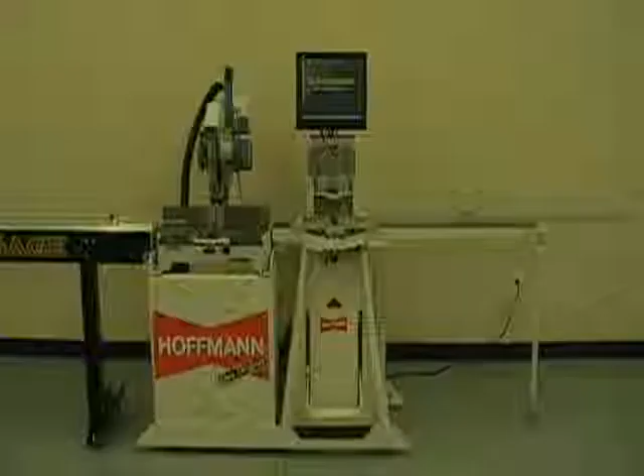The automatic stop system is made by Technical Services Inc., the designers of RazorGage. We offer machine packages with 8-foot or 10-foot stops, and we can also supply longer or shorter lengths if needed.

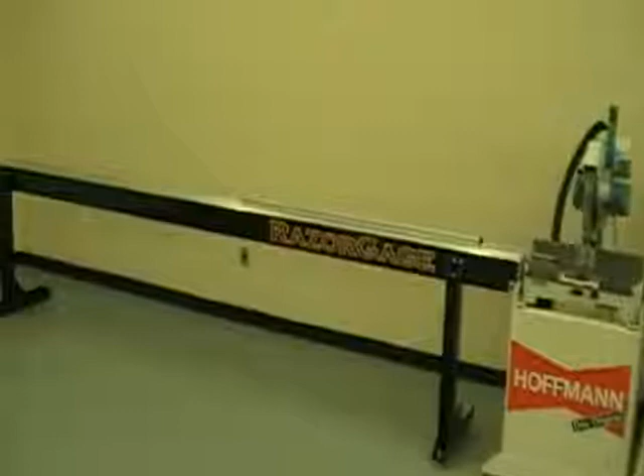The RazorGage systems distinguish themselves from the other stop systems on the market by paying close attention to the critical details. Instead of relying on plastic or steel wear strips, they utilize THK linear bearings and steel rails for the carriage travel. Also, they use larger zero clearance pulleys with planetary gears, and each RazorGage is laser inspected for accuracy prior to leaving the factory.

Precise and accurate cuts are critical for tight-fitting joints and perfectly square face frames. The cutoff saw is a production model made by OMGA Woodworking Machinery, and it has proven itself in thousands of woodworking shops around the world. The machine has a heavy cast iron base and is a belt drive design, 2 features that reduce vibration and improve the quality of cuts.

The 14-inch blade gives us a maximum cutting width of 6 3/4 inches at a 90-degree angle. This covers the vast majority of face frame stiles and rails.

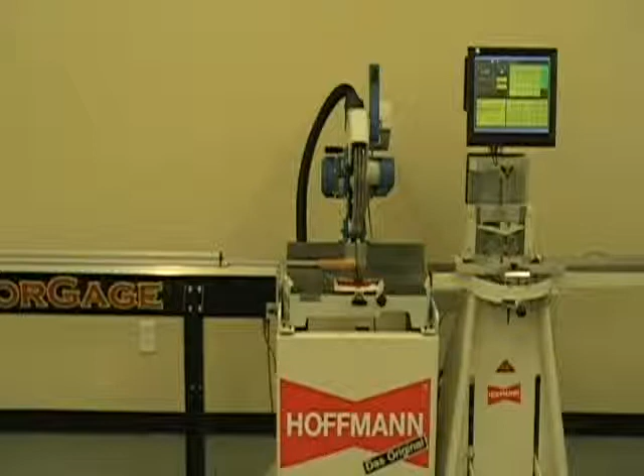MORSO notching machines have been used around the country and around the world since 1911. We've been the U.S. importer for over 10 years. The company makes both manual and automatic models and are all available from stock. For this video, we've installed the foot-operated NFXL model.

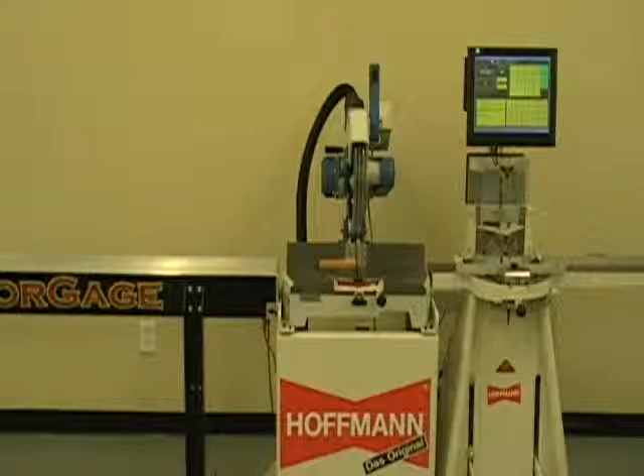This machine accepts molding up to 6 inches thick and 8 inches wide. All hard and softwoods can be processed with ease. In fact, we have customers building the face frames with soft pine and cypress, and on the other end of the spectrum with rock maple, teak, and even ipe.

To design a face frame right on the screen, open the face frame builder, then click on New Frame. And for our example of a vanity base, enter the overall height of 36 inches and the width of 30 inches. Depending on the cabinet, a top rail might be wider to allow for crown molding, or a stile may be extra wide for scribing. The software is designed to accommodate varying widths of stile and rail.

In our example, we're using a 2-inch top rail, a 4-inch bottom rail, and 2-inch wide left and right stiles. With the perimeter parts selected, press OK, and the basic frame is now displayed on the screen. To add a cross rail between a drawer and a door opening, select Rail, enter the clear dimension between the upper rail and the new cross rail. In our example, we are using 6 inches.

To add a vertical divider, click on Stile. If you want it centered, click on this box. The program will do the rest. When all the parts are added, click on Save Frame, give the frame a name, and save it on the PC. Now click on Make List. This will format the entered data into a cut list, which is also displayed on the screen. The designing portion is now complete. The next step is the machining process.

Open the RazorGage software, select Auto List, and click on a file name. A detailed list of all parts needed for the selected frame is now displayed. Select the first piece and the RazorGage will automatically move into position. After cutting the part to length, click Part Cut. If there are multiple parts to be cut, the program counts down the total and draws a line through the description after the last piece is cut.

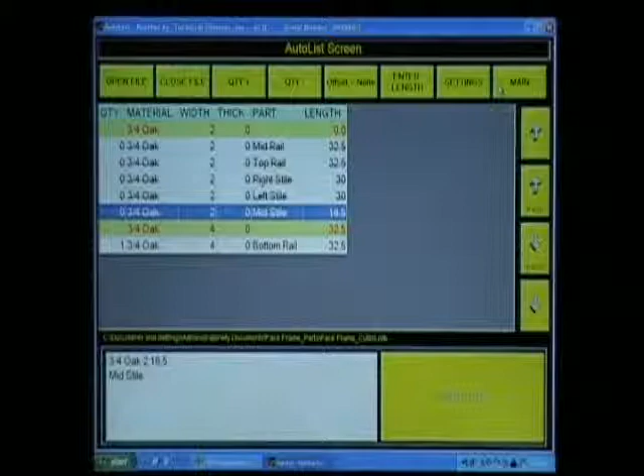When all the pieces are cut to length, the stiles and rails are now processed on the MORSO notching machine. On the main screen, select Notching. Highlight the file name to see a list of all parts needed for that particular frame. Select the part displayed on the screen, with all required notch cuts highlighted. Place the molding on the machine table and click on the screen to advance the stop system to the first notching location.

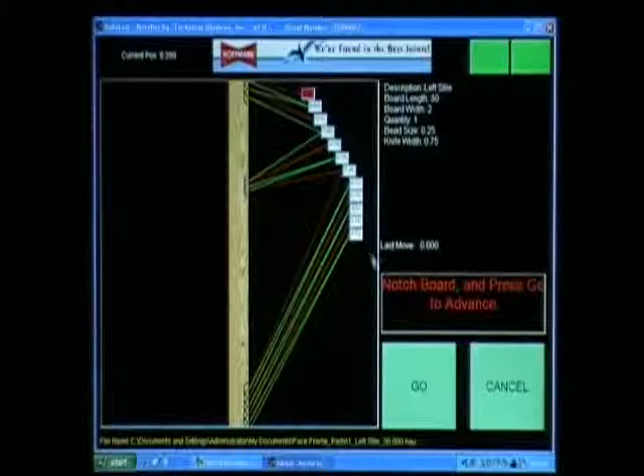Holding the molding with the left hand, the cutting head is moved toward the beaded edge with a hand lever, and stepping on the foot pedal brings the head down. Multiple passes are needed for clean and tear-free cuts. Depending on the wood species, it usually takes from 2 to 4 cuts to notch a bead. When the rail is finished, it is set aside and the next piece is processed.

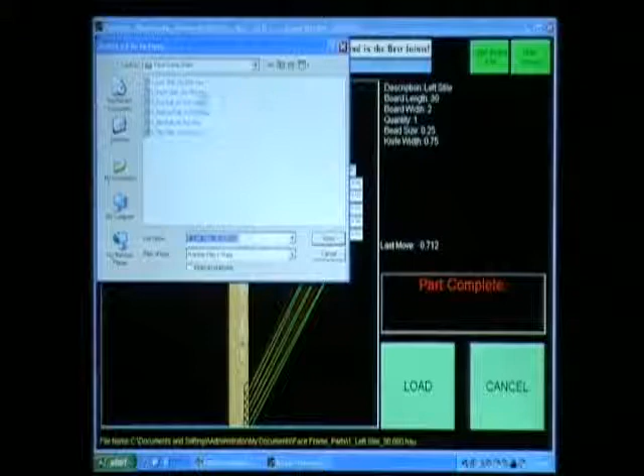The knives are designed to stay sharp for a long time. In custom woodworking shops, we frequently see them used for over a year before they are sent back to us for resharpening. We have the equipment necessary to regrind and hone the knives to factory specs, and we generally return them to the customer in just a few days.

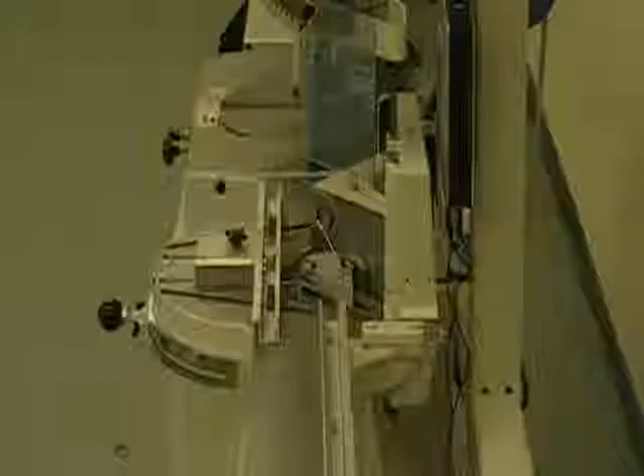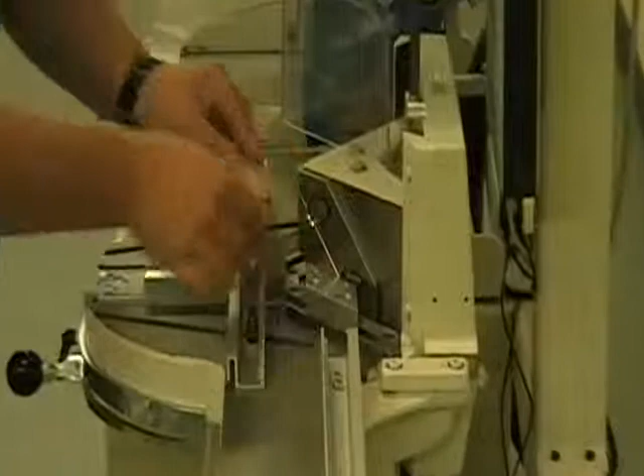Here we are doing a quick demo on the MORSO NFXL. The stile is placed face up on the table, and multiple steps will assure a clean notch. The adjustable stops next to the head are set to limit the travel of the cutting head. These are adjusted to match your bead. You can easily cope the end of the rails in one single pass.

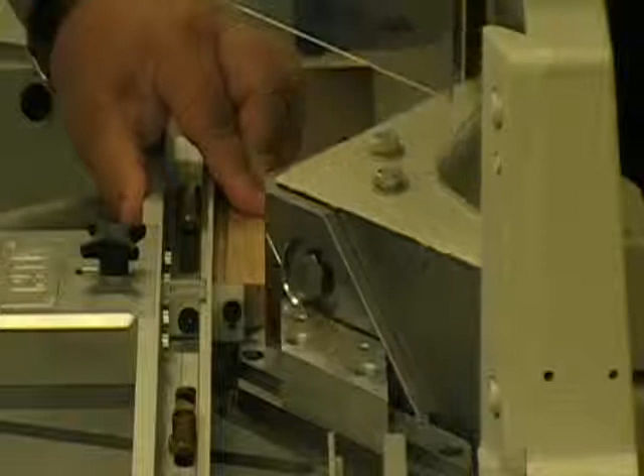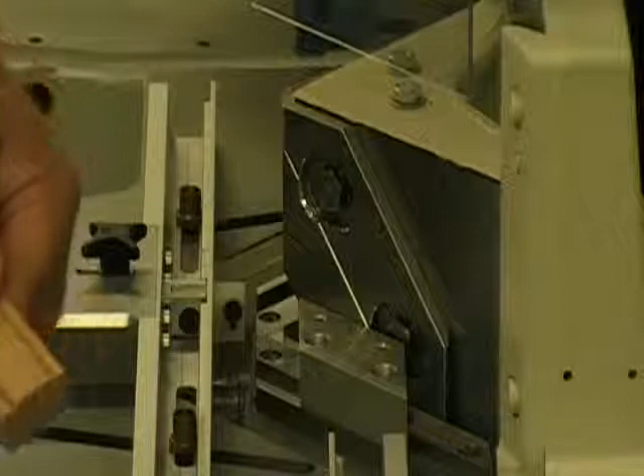After the stile is notched and the rail is coped, you'll have a tight, perfectly aligned joint and are now ready to go to the next step. Notching machines are available in the manual version as you have just seen, or electro-hydraulic for higher productions.

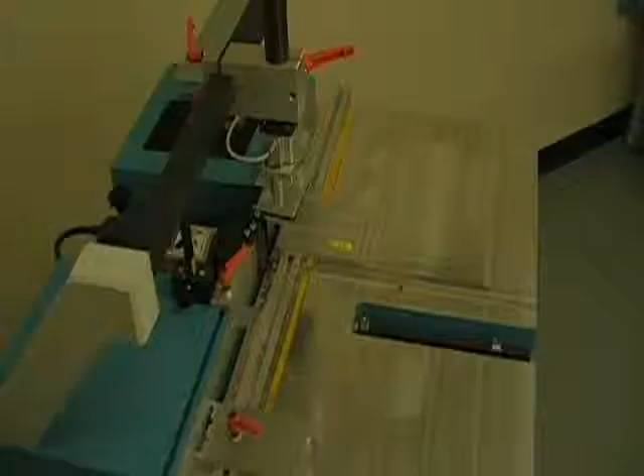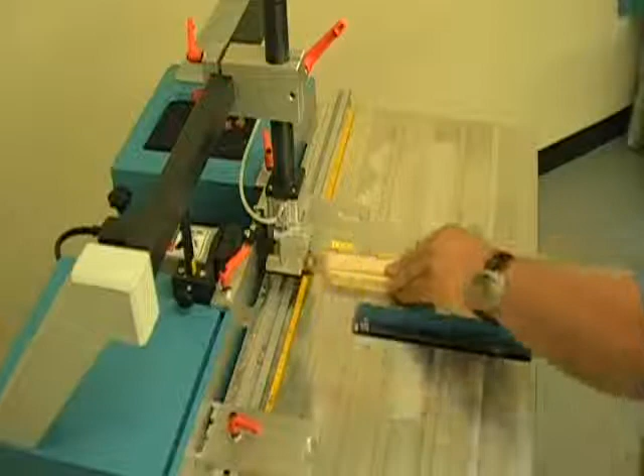Once all of the components of a face frame are finished, the frame is assembled using the Hoffmann dovetail joining system. We have set up our PU2 floor model routing machine for this operation. The fixtures on the machine locate the notched molding precisely above the router bit, and the square stop is used to reference the location of the coped rail.

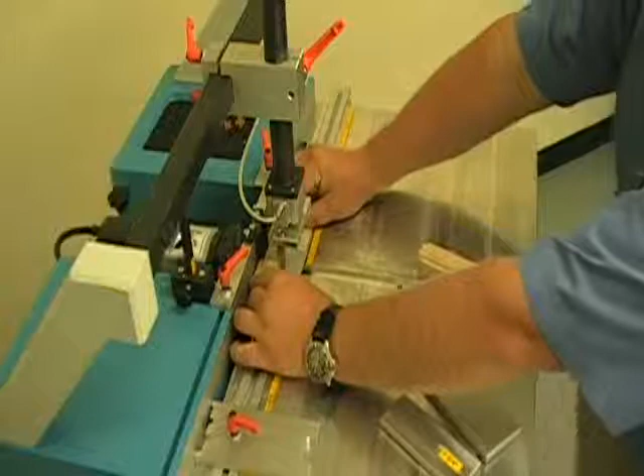Once the keyways are routed, some glue, the dovetail keys, and a hammer is all that's needed to assemble the frame. No assembly tables, presses, or clamps are needed to complete the frames. This completes this portion of the video on our face frame combination system.

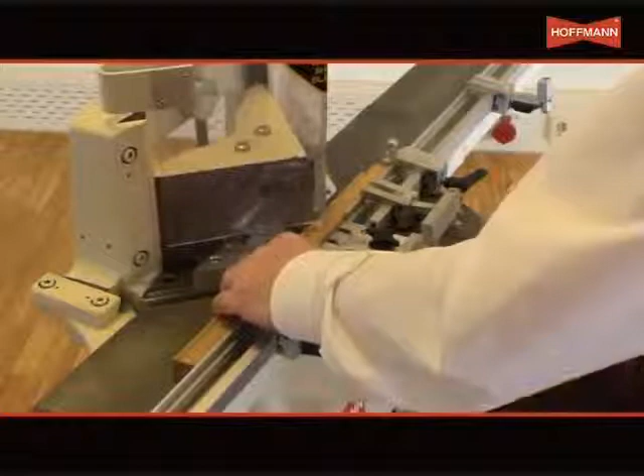Cutting the notch positions in stiles using the MORSO NFL. Place the workpiece on the table and start by cutting the corner first. By moving the profile, nibble in stages until it reaches the stop. Flip the stop back, move the workpiece to the second stop by using the hand lever. Make 2 or more stage cuts as required to make the second notch.

Move the workpiece beyond its final position and trim the corner. To start the final notch cut, set the flip stop in its final position and finish the final notch. The first stile is now complete. The second stile, opposite hand, is processed in exactly the same way.

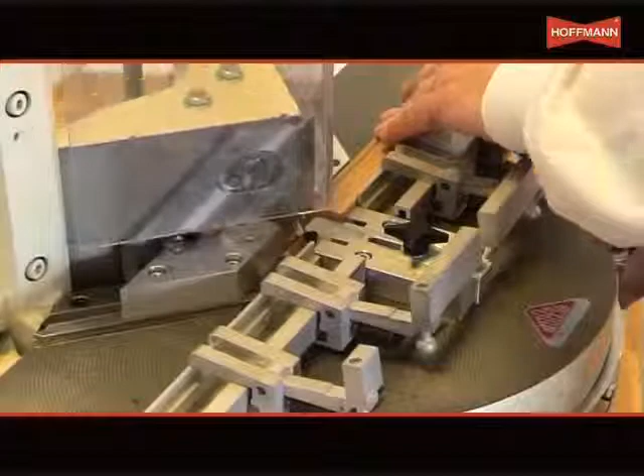To cope all the corners, release the center stop, move it forward and then retighten. Position the ends of the top rail against the stop and cope the corners of the beaded edge left and right. Position the center rail against the stop and cope all the corners. Position the bottom rail against the stop and cope the corners. The frame is now fully notched.

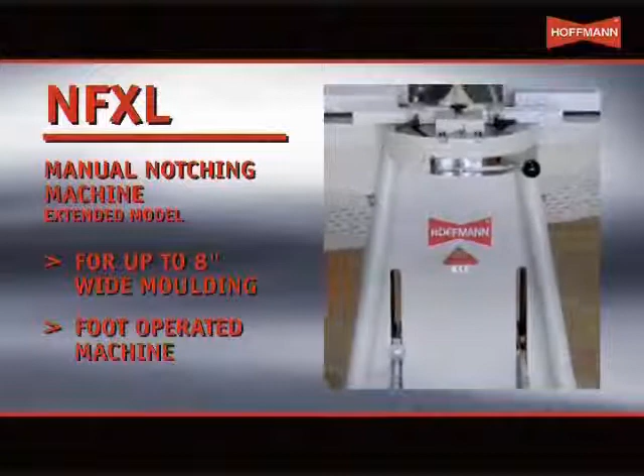Cutting the notch positions in stiles using the MORSO NLEH. Place the workpiece on the table and start by cutting the corner first. By moving the profile, nibble in stages until it reaches the stop. Flip the stop back, move the workpiece to the second stop and using the 2 hand buttons actuate the machine to make 2 stage cuts to make the second notch.

Move the workpiece beyond its final position and trim the corner. To start the final cut, set the flip stop in its final position and finish the final notch. The first stile is now complete. The second stile, opposite hand, is processed in exactly the same way.

To cope all the corners, release the center stop, move it forward and then retighten. Position the ends of the top rail against the stop and cope the corners of the beaded edge left and right. Position the center rail against the stop and cope all the corners. Position the bottom rail against the stop and cope the corners. The frame is now fully notched.

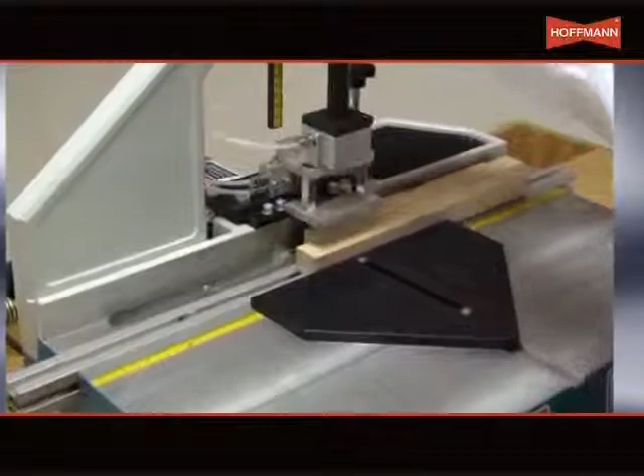The notches have already been processed on the MORSO guillotine. We must now router the dovetail slots in the profiles using the Hoffmann dovetail routing machine. Using the center fence and packing piece, lay the first stile in position and lower the clamping unit to the workpiece. Start the routing process using the foot pedal and router the first dovetail slot.

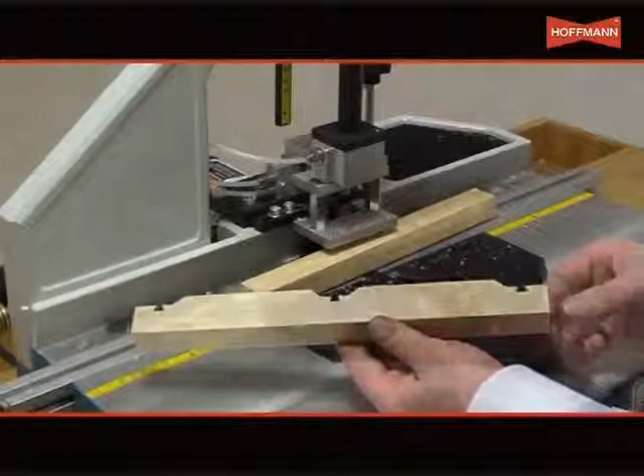Move the workpiece to the next notch position and repeat the process for all notch positions. The second stile, opposite hand, is processed in exactly the same way with Hoffmann dovetail routed slots. We then change over the fence system to accept the cross rails. Remove the centre fence and replace with the sliding stops against the set screws.

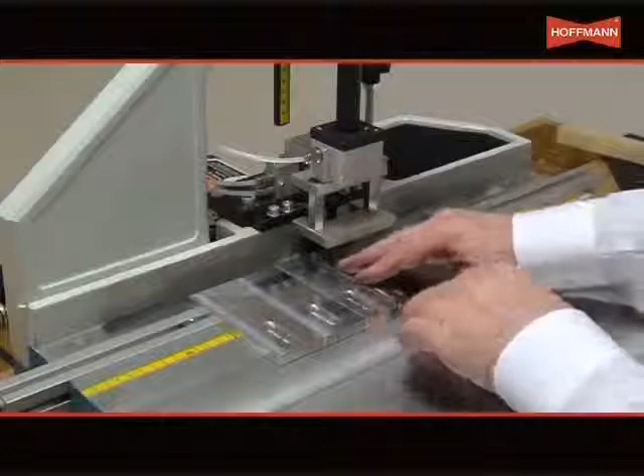We can now process the cross rails. The simple rule to follow is that a beaded edge is always laid against the sliding stop. The foot pedal is pressed to actuate the routing process.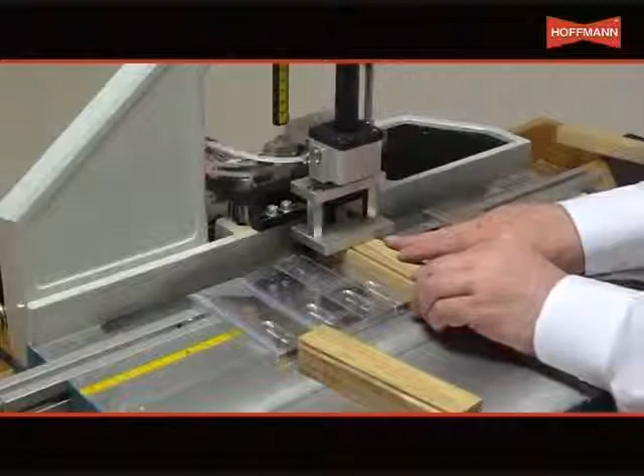Slide the stops to the right hand side of the machine and process the other end of the rails. Centre rails, which are double beaded, can be processed without sliding the stops to the other side. The complete frame is now processed, ready for assembly.

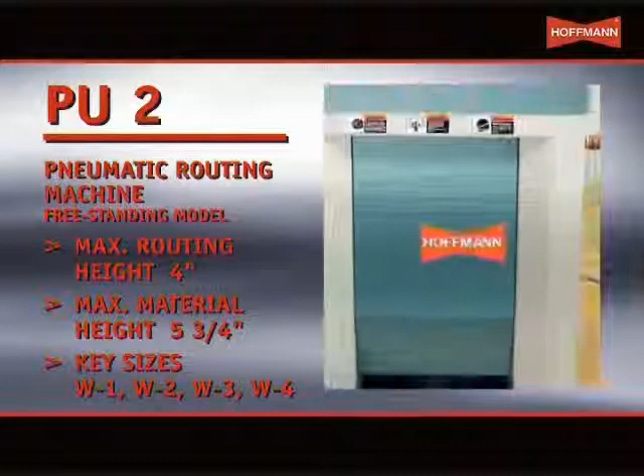To complete the assembly, glue is applied to the mating surfaces, and Hoffmann dovetail keys are inserted to draw the joints together. In production, a complete frame can be notched, routed and assembled in approximately 4 minutes per frame.

Hi, I'm Steve Hosher with Technical Services Incorporated, and I help create the RazorGage line of saw stops and measuring tables. We at Technical Services RazorGage developed this video to provide you with a better understanding of precision linear positioning and to demonstrate the benefits RazorGage has to offer.

Our RazorGage products are designed around the following design criteria: reliable long-term accuracy, ease of installation, maintenance, and repair, open control architecture, and choice. Reliable long-term accuracy to us means to minimize the likelihood of your producing a bad part ever. Not just for the first 3 months or the first 3 years. Our goal is to provide a positioning system that goes to the right place all the time, period.

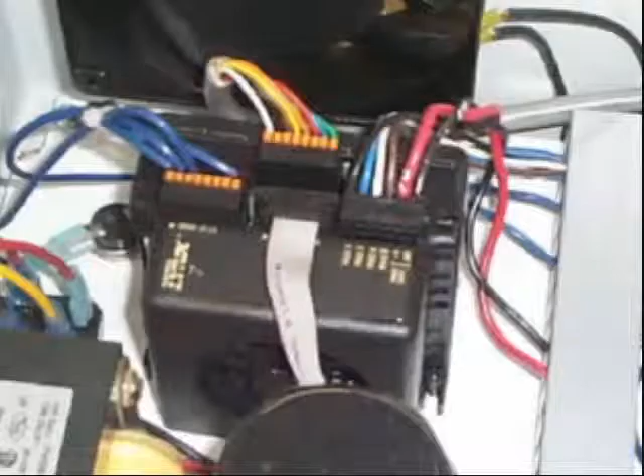In order to explain the steps we take to attain reliable long-term accuracy, let's take a look at how motion control technology works. A typical linear actuator includes a controller and drive, motor, mechanical drive system, support bearing, and an encoder mounted to the rear of the motor. The controller and drive make the drive shaft rotate. The drive mechanism converts the shaft rotation into linear motion. The support bearings maintain the orientation of the carriage as it moves.

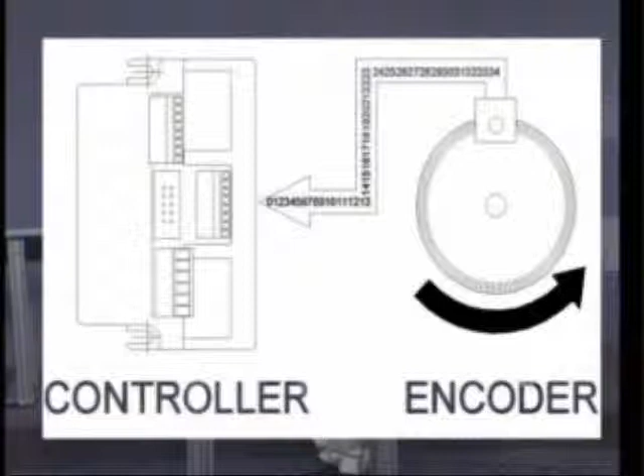The controller verifies the commanded motor position by keeping a running count of the pulses returned by the encoder. Equations in the controller convert these pulses into theoretical linear position. Since the controller only knows the position of the encoder, the challenge on this type of system is to try to make sure that if the stop moves, the encoder moves.

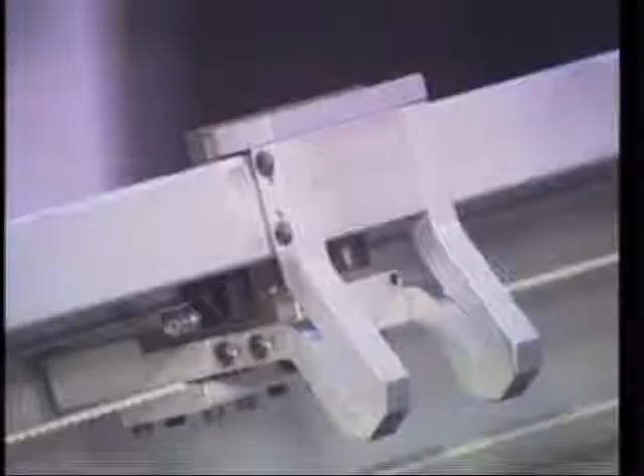Controlling play in the carriage support bearing is the first step in keeping stop position in sync with the encoder. It's the job of the carriage support bearing to maintain the orientation of the carriage as it slides down the rail. If the carriage support is sloppy, then the stop position can change. For the RazorGage carriage support bearing, we've chosen a machine tool grade recirculating ball bearing block riding on a hardened and ground steel rail. The balls in the bearing block are selected to provide a negative clearance condition or preload to eliminate slop. A tight-fitting seal keeps sawdust out and lubrication in.

This style of bearing assembly is rated for over 3,000 pounds radial static load and has a long history of successful application in high-end machine tools and woodworking equipment. There are no gibs or pads to adjust. Just grease the block a few times a year and this bearing will be rigid for years. Eliminating slop in the carriage support is easy. You just find the best bearing on the market and buy it. But there are a number of components between the carriage and encoder that can introduce lash into the system.

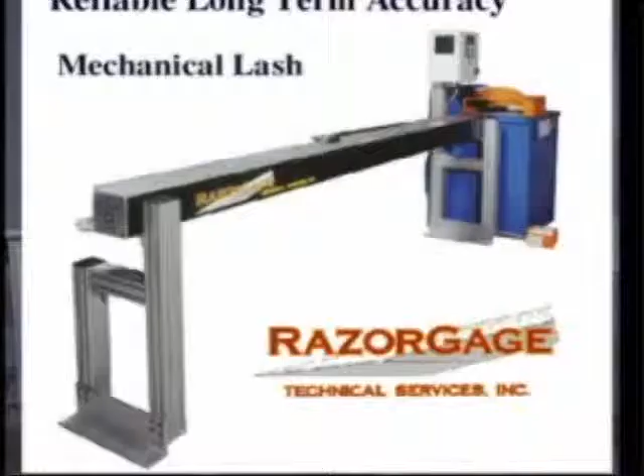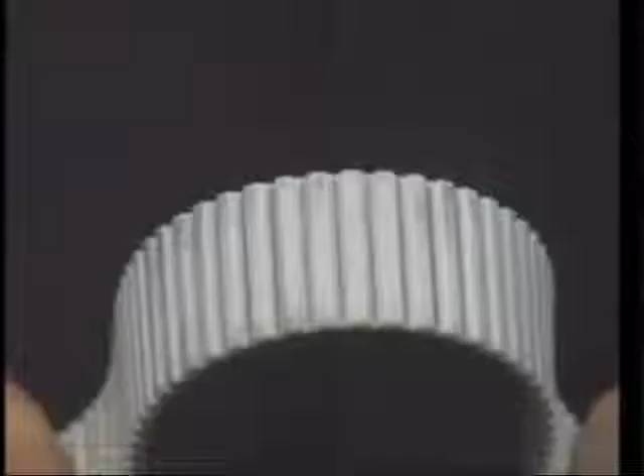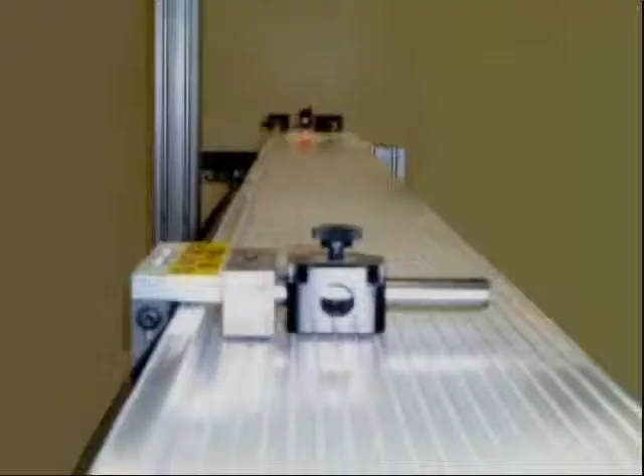We approach mechanical lash in the drive system differently on the different RazorGage models. On any rotary encoder system, long-term accuracy depends on the integrity of the drive components. For RazorGages using a belt drive, we use a high-test polyurethane belt reinforced with steel cables to resist stretching. We use a zero-clearance drive pulley to eliminate the play inherent to standard belt and pulley combinations, and we drive that with a precision planetary gearhead with near-zero backlash. To top it off, we calibrate each unit with a laser displacement meter before shipping so we know it's accurate before it leaves our plant.

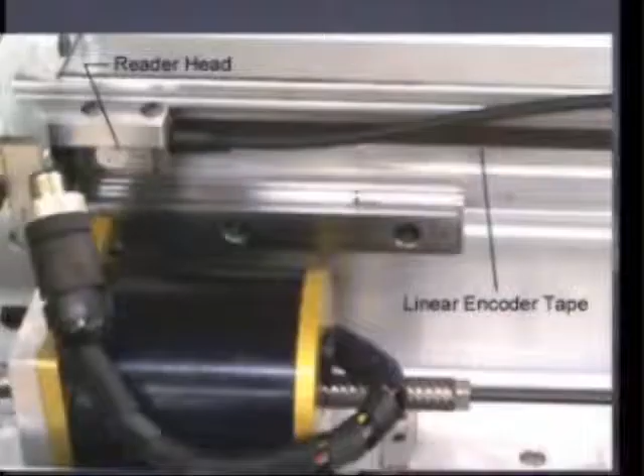While we offer the RazorGage with rotary encoder feedback, we do so knowing that one day something as insignificant as a loose set screw, a washed out keyway, or imperfect belt tension can completely undermine our desire to provide reliable accuracy. That's why we pride ourselves on manufacturing the ultimate programmable saw stop, our top-of-the-line linear encoder models. By eliminating the rotary encoder from the back of the motor and instead using a linear tape encoder that runs the length of the table, we completely eliminate all problems associated with mechanical lash. The linear encoder ensures that no matter what condition our drive system is in, the controller still gets accurate positional feedback.

The non-contact operation and solid-state design of the linear encoder makes it a long-life device, and since it's magnetic and not optical, a dusty environment doesn't affect the operation. As we all know, any device can fail, so as further assurance that you make only good parts, we provide an on-target lamp on all motor-driven RazorGages.

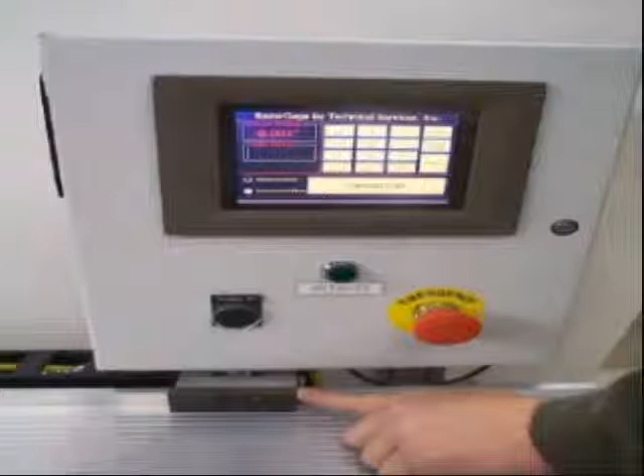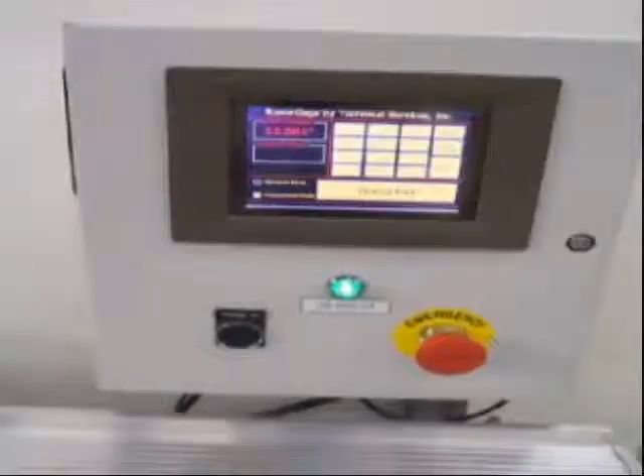If some problem develops with the linear encoder, such as a crushed cable or a loose connector, the erroneous signal will cause the lamp to flicker or not come on at all. But when the lamp is on steady, the chances are very slight that you can make a bad part. This light is wired in series with a relay so you can lock out the saw when the stop is not in position. These and other measures enable the screw-driven RazorGage to achieve plus or minus 0.03 of an inch accuracy over 10 feet.

To back up our claims, we laser check every linear encoder RazorGage before we ship it, and we put the charted results in the manual so you can be sure your product meets RazorGage standards. We believe we make the most accurate and reliable stop on the market, but when components fail, we make them easy to service by incorporating this removable guard.

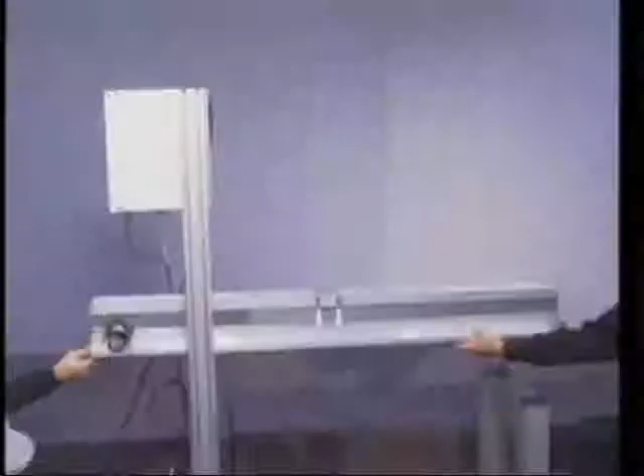4 screws secure the removable back guard panel that, when removed, allows access to the entire inside of the RazorGage. Electrical components are easily accessed in the eye-height mounted electrical enclosure. All our parts are standard catalog items that can be bought from local distributors.

We make the RazorGage more flexible by using an open control architecture. That just means we use products that can be customized and serviced by your own people or by someone in your local area. Our controller is programmable and expandable with software, manuals, and programming examples that can be downloaded from the manufacturer's website. You don't need to come to us if you want to change.

We provide you with a truly easy way to download cut lists over your PC network, our CE option. A color touchscreen PC running Microsoft Windows CE replaces the standard keypad. It supports Ethernet communications, barcode readers, and an optional printer port, and enables the RazorGage operator to download cut lists from a PC on your existing Ethernet network.

You just paste your data into an Excel spreadsheet, save it, and it's available to the RazorGage operator on the manufacturing floor. For applications requiring a full-blown PC, we offer the PC option. It includes a color touchscreen panel PC running a Microsoft Windows operating system.

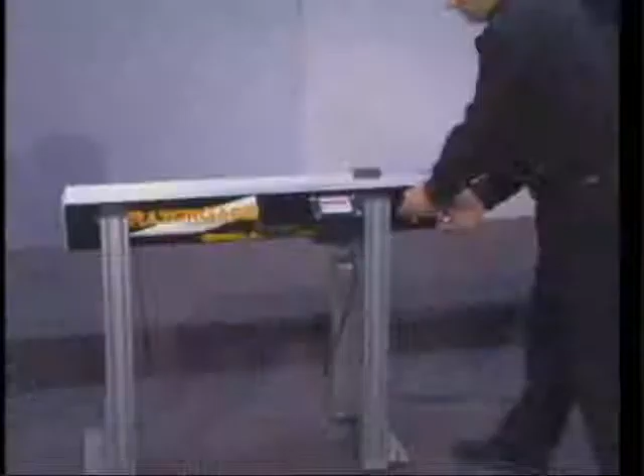It is accurate to plus or minus 0.05 of an inch over 10 feet, is available in strokes from 24 inches up to 22 feet, and can be motor-driven or hand-wheel driven. The hand-wheel drive unit is great if you want the RazorGage performance at an unbeatable price. We also offer all the belt-driven RazorGages with rotary encoders if you can live with tolerances in the plus or minus 0.15 of an inch range.

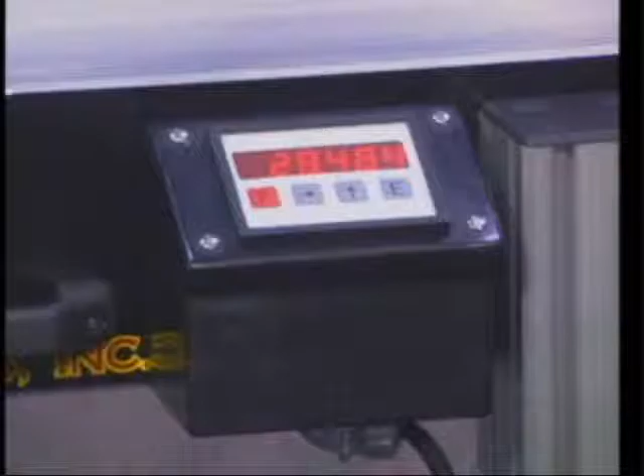If you just want to measure parts, we offer the RazorGage caliper measuring table. You just put the part on the table, push it against the hard stop, and measure it. Well, we've talked about the 4 major benefits we strive to provide as we design the RazorGage and the means by which the RazorGage achieves them.

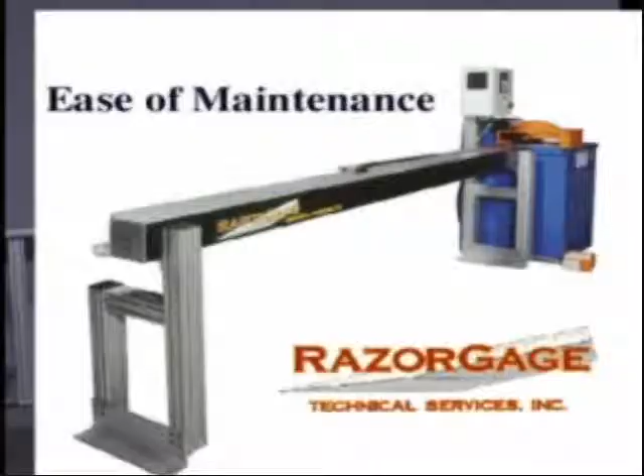Reliable long-term accuracy. We use machine tool grade linear bearings to maintain carriage orientation and minimize lash on our rotary encoder systems, and eliminate the harmful effects of lash with the linear encoder on our high-end systems. Ease of installation. Our integral table and fence, removable back guard, and easily accessible electrical enclosure make the RazorGage easier to install and maintain.

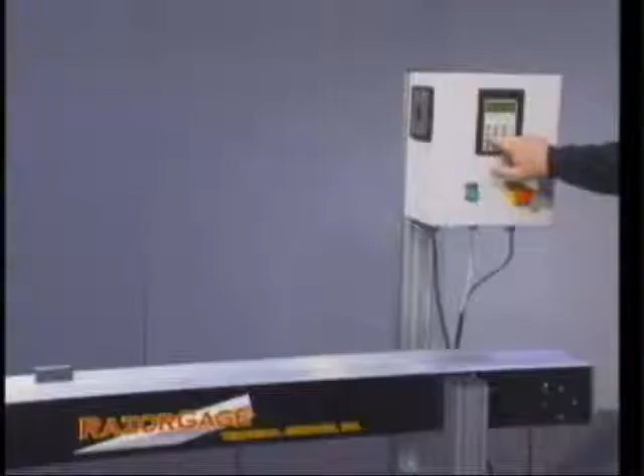Open control architecture. We use off-the-shelf programmable components and offer solutions running Microsoft Windows so you can download cut lists using standard Ethernet and Microsoft Excel, or can hire local experts to develop custom applications. Choice. RazorGage is available in models designed to meet the demands of your application. The hand-wheel drive unit, the motorized belt drive with rotary encoder, and the top-of-the-line linear encoder actuators.

I hope you found this presentation helpful, and I hope our design goals are consistent with and will help further the goals you've set for your shop.